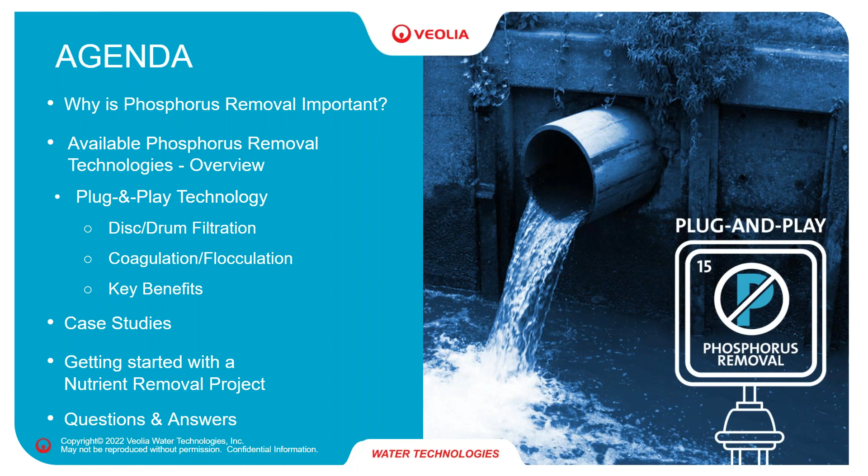And then we'll have some time for questions and answers at the end. So as I said, we'll start with a little bit of groundwork. Why is phosphorus removal important?

It really comes down to our environment and the impact that nutrients can have when discharged into the waterways. So when these nutrients, nitrogen and phosphorus-based compounds, get into the waterways, it really results in the algae present in those waterways using that and growing excessively. This is called eutrophication. And when they do that, they're uptaking the oxygen in the water, and that has a negative impact on the aquatic life. So many places will see fish kills and other damage to the ecosystem there, which is not a good scenario.

It's also can be quite unsightly from a tourism and swimming type scenario. So definitely things that the governments and the people have decided that this is not something we want to continue.

In terms of sources of where this comes from in wastewater, it can be residual nutrients from the processes that a particular plant may have. Could be cleaning chemicals—many of those use phosphate type compounds in their chemicals and detergents—and then nutrients inherent to just organics. So farming and even municipal wastewater carries with it nutrients laden in that.

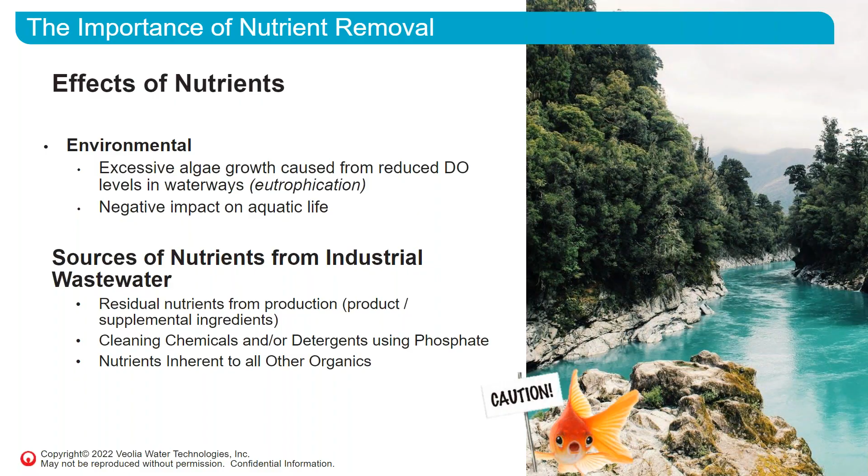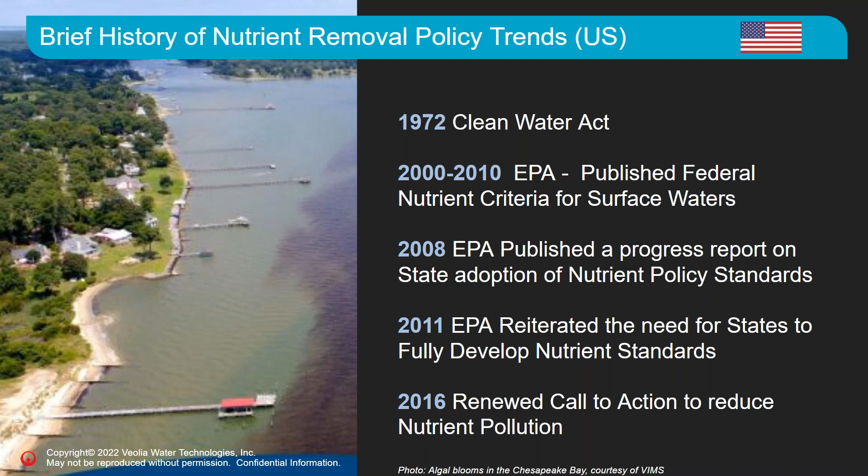In 1972, the U.S. had the Clean Water Act passed, which really began a focus on protecting and trying to restore these waterways. You can see throughout the 2000s following that, EPA publishing nutrient criteria progress reports on where that stood in 2008. In 2011, reiterating the need for states to really develop the nutrient standards they needed to protect the waterways within their boundaries. And in 2016, again, a renewed call to action to reduce nutrient pollution. You can see here on the left a photo of Chesapeake Bay in eastern United States.

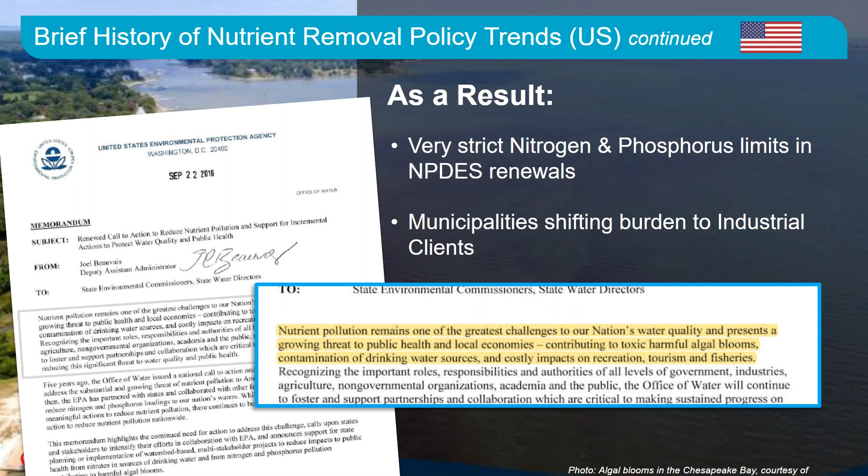As a result of this, we are seeing and have seen over the last several years increasingly strict both nitrogen and phosphorus limits in these permit renewals. Municipalities are really shifting that burden onto, as they can, their clients that are sending them wastewater to the treatment plants. You can see here just a little snippet from this EPA memorandum: nutrient pollution remains one of the greatest challenges to our nation's water quality and presents a growing threat to public health and local economies, contributing to toxic, harmful algal blooms, contamination of drinking water sources, and costly impacts on recreation, tourism, and fisheries.

We have many attendees here, I believe, from Canada as well today, and a very similar scenario, although regulation for Canada is really at the provincial level. But nonetheless, an evaluation is really made at the local level with these receiving water bodies to determine how sensitive they are and what types of impact the wastewater could be having coming in, and what the limits need to be as a result, to try to limit and improve those impacts and improve the water body.

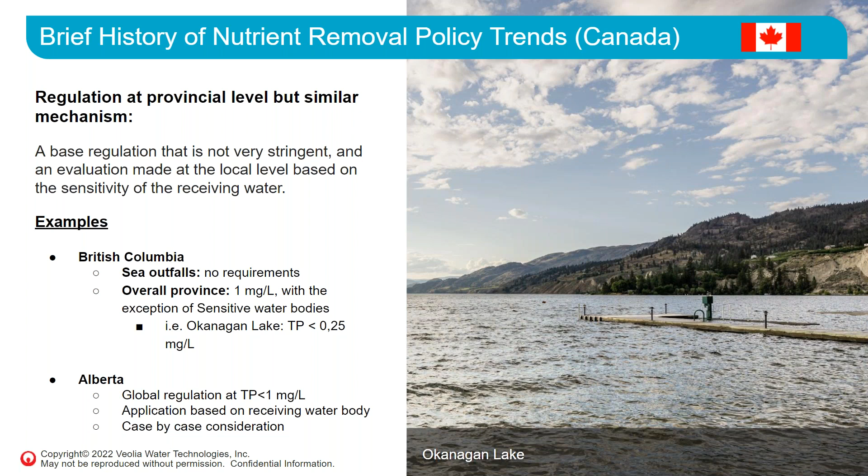As an example, in British Columbia, while sea outfalls really don't have any requirements overall, the province has a 1 milligram per liter total phosphorus limitation, but then sensitive water bodies such as Okanagan Lake can have more stringent limits, as we see here with a total phosphorus of 0.25 milligrams per liter. And then again, Alberta is another example of global regulation within the province—total phosphorus less than 1 milligram per liter—but it can be a case-by-case consideration on whether a receiving body may need to have more stringent limitations for those ones that may be discharging into that water body.

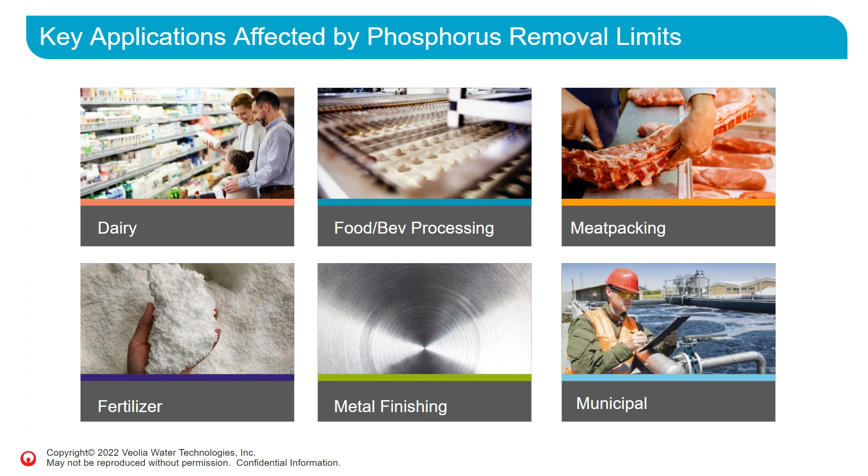Now, what are some key applications that could be affected by this? Well, it really is a wide spectrum, as you can see here, from dairy, food and bev processing, meat packing, fertilizer producers, metal finishing—where they can use phosphate type chemicals in that process—and of course municipal wastewater, as we mentioned earlier. So this certainly doesn't cover all of those industries, because at the end of the day, if you have a limitation that needs to be met, then you're impacted here by this and the need to remove the phosphorus.

So we're going to go into the discussion of technologies, and from sort of a big overview perspective, many plants will have many stages of treatment. You could have primary treatment to remove solids at the first stages of the plant. Many times these stages, if the plant has a nutrient removal requirement, will implement chemical dosing to enhance their primary treatment in order to start to remove the phosphorus.

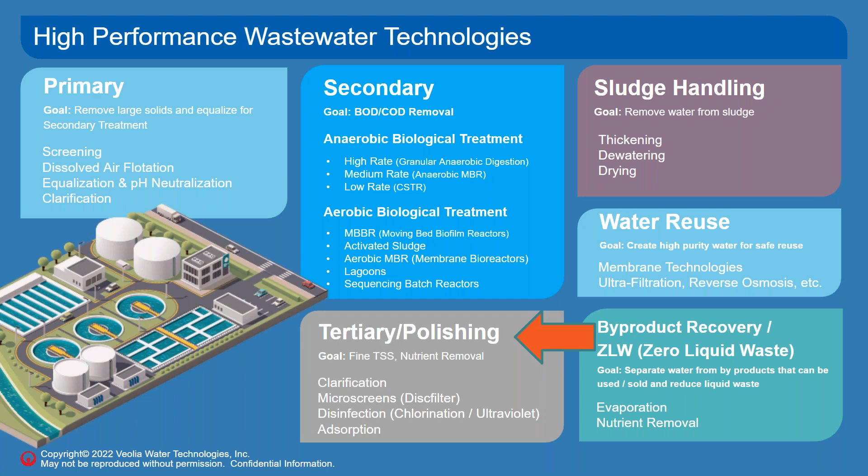Secondary treatment is another key component, where you can have typically biological treatment to help with removing phosphorus. That's very effective. The technology we're going to share specifically about today would usually be considered the tertiary or polishing step, to really get to the low levels of phosphorus removal and effluent limitations that need to be met.

So when we talk about phosphorus or nutrient removal, today we're really focusing on phosphorus. There's two main categories or methods. One is biologically, where we're talking about systems like activated sludge, sequencing batch reactors, MBBR, membrane bioreactors. All of these use biological treatment systems with bacteria, using the nutrients and uptaking them in order to process them and remove them through the floc, being disposed of through the biological sludge from those processes.

Alternatively, you have physically or chemically those methods of removal. Here, physically, we're talking about clarification, so settling, and that could be either traditional clarification with large retention times and a settling mechanism to allow the solids to settle, or high rate clarifiers, which use methods to speed up that process and get the solids to settle faster. Could be flotation, could be filtration, from media filters to actual cloth filters.

But in any case, many times the phosphorus is not only in a solid form, it can be dissolved in the water. And when it's dissolved, a chemical step will be needed to turn that from a soluble form to be precipitated with a chemical reaction and turn it into a solid form. And so that's what we're talking about here with coagulation and flocculation. Those steps can be combined with physical separation in order to increase the phosphorus removal.

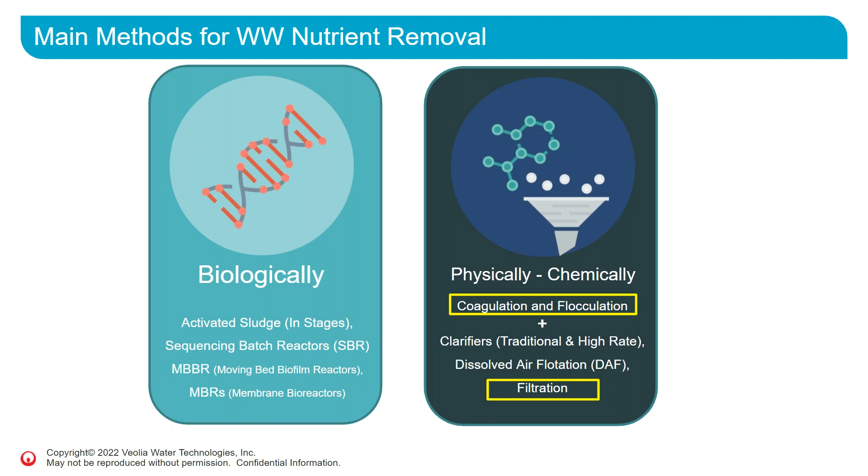All right, so continuing then with just a very rough, I wouldn't say highly detailed, but from a general standpoint, most sites will be able to use biological treatment for achieving levels down to about 1 milligram per liter of total phosphorus. And having said that, these other methods as well can be used to take higher levels down to that as well. But oftentimes we see that many sites, if they have biological treatment, will achieve about 1 milligram per liter with clarification and settling or flotation, whatever the process may be they have on site, and maybe with some backup means of coagulation for trimming and meeting their effluent limitations.

Typically, to get down to less than that, into the roughly 1 to 0.5 range, a client may need to add another step behind the clarification method. That could be, in this case, microscreens as an example of filtration following the clarifiers. That will typically get to about 0.5 milligrams per liter. Getting down to below that, into the say 0.3, 0.2 range, would require an added step ahead of those filters with coagulation and flocculation, and I'll be explaining that as we talk further. That could typically get you down to as low as below 0.1 milligrams per liter, and then ultra low, less than 0.05, you're talking about quite intensive membrane filtration to achieve those limitations.

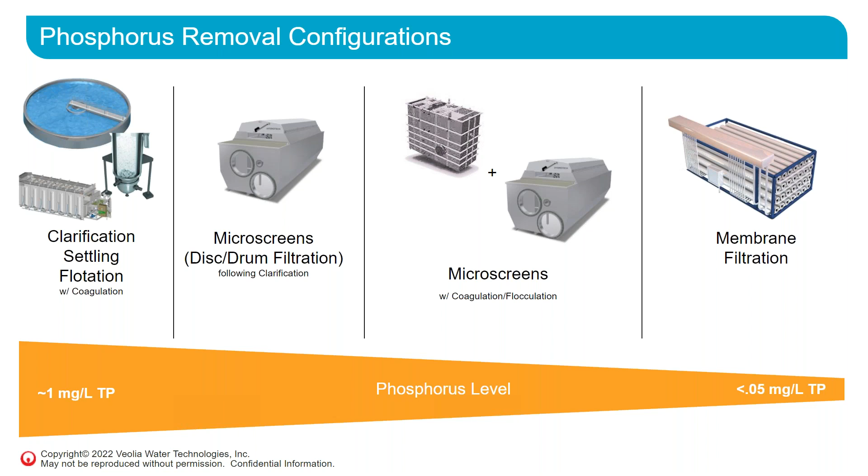So we wanted to share with this webinar specifically the technology we call plug and play phosphorus removal process, which we've termed Nutri-Pack. Pack just being focused on the plug and play aspect and being able to package this together.

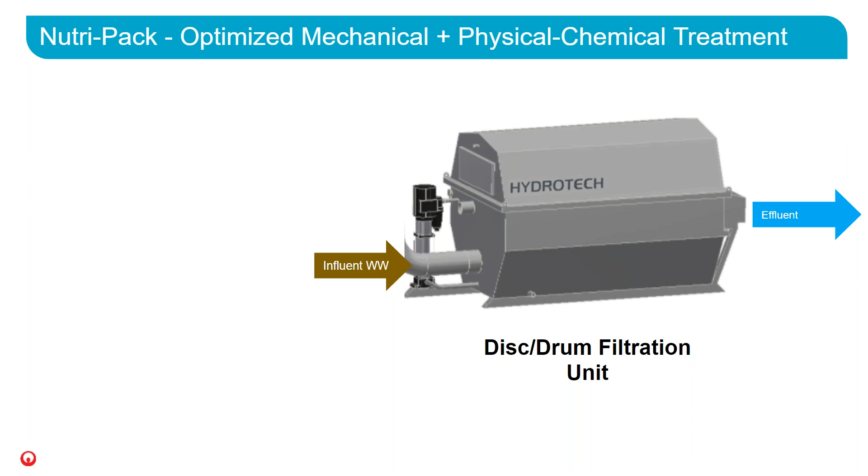As I said earlier, this is focused around our Hydrotech filtration technology. It's been established for many years, and this is either a disc or drum filter, and I'll share more details of that in a minute.

But the exciting thing here is we now have a few categories where we have pre-engineered coagulation and polymer systems to allow this to be coupled up and get removal of not only particulate phosphorus, but if you have soluble phosphorus in solution needing to meet low limits, this can be added and packaged with the system to meet those needs. We'll be sharing the details on this.

So first, to talk about the filters, Hydrotech filtration. This is a proven technology. I started selling the disc and drum filters in the 1990s, so over 20 years of experience with this technology, with continued development to improve it.

It's what we call an inside-out filtration process, which I'll explain further in a minute. It's very effective at solids removal. The media ranges from 1,000 micron in size to 10 micron, and at those small 10 micron opening cloths we can get very effective solids removal, up to 95% suspended solids, which helps us achieve high levels of removal when precipitating phosphorus and trying to get it out of solution.

It has a very small footprint when compared to other filtration technologies, particularly sand filters or, in extreme cases, clarifiers. This will be just a fraction, could be 10% or less, of the footprint required to treat the same flow capacity. And it's very efficient.

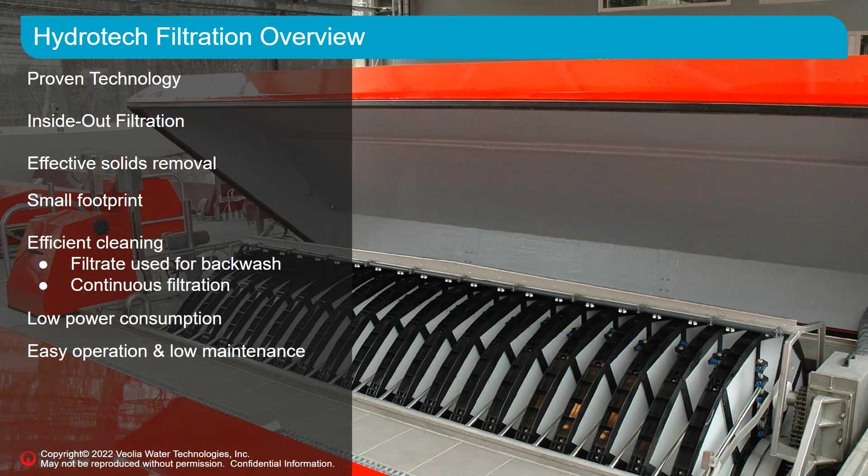How do these work? I mentioned these were what we call inside-out filters. To explain that a little, you see a couple of diagrams, one showing a disc filter sketch and also a drum filter sketch. These both operate in the same format in that the influent comes into the center of a central drum.

For the disc filter, from that drum the water flows inside to the inside of discs with woven cloth media on each side of those discs. For the drum filter, the water flows inside and then goes through the cylinder, through the circumference of the cylinder where the media is wrapped around the unit. But in both cases, the effluent flows to the clean side.

The solid particulate is captured on the inside of the media, and then the clean filtrate is discharged over an effluent weir.

As the solids collect, the head loss increases through the media, and so the inlet water level rises. As it does, that is monitored with instrumentation to trigger the backwashing process, which rotates the drum and starts the high pressure spraying to clean the particles from the media. Then the solids are collected in a trough suspended inside the drum and flow out of the unit. You can see the sludge outlet here from the disc filter and the sludge outlet here from the trough on the drum filter.

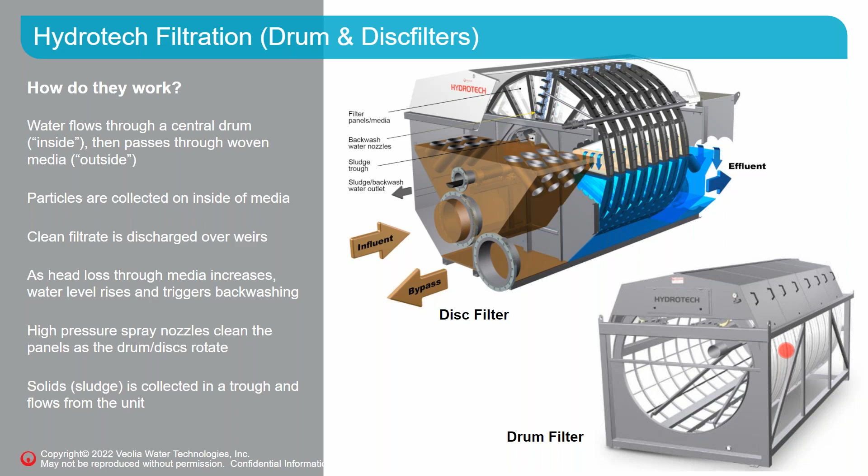Here's just a couple of photos to show you what a disc filter media panel would look like. You can see it's very accessible, easy to inspect, as well as, if there needs to be a replacement for any reason, easy to get access and do that.

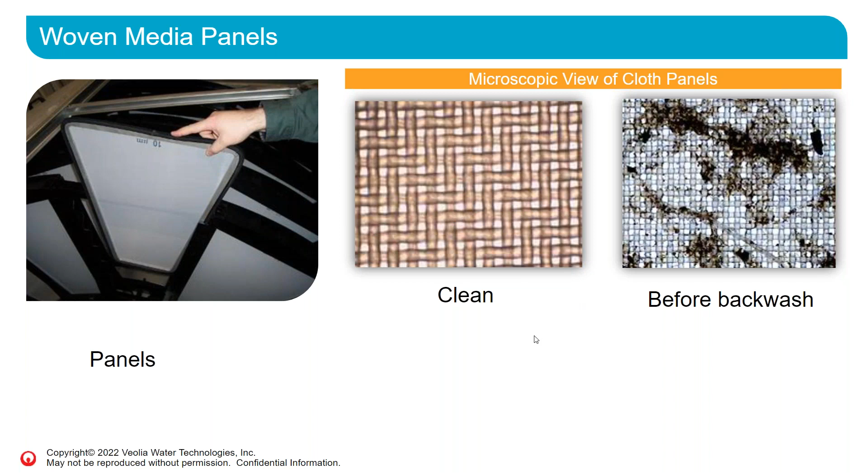Here you see microscopic photos of clean woven media, and then before backwash with the solids collected.

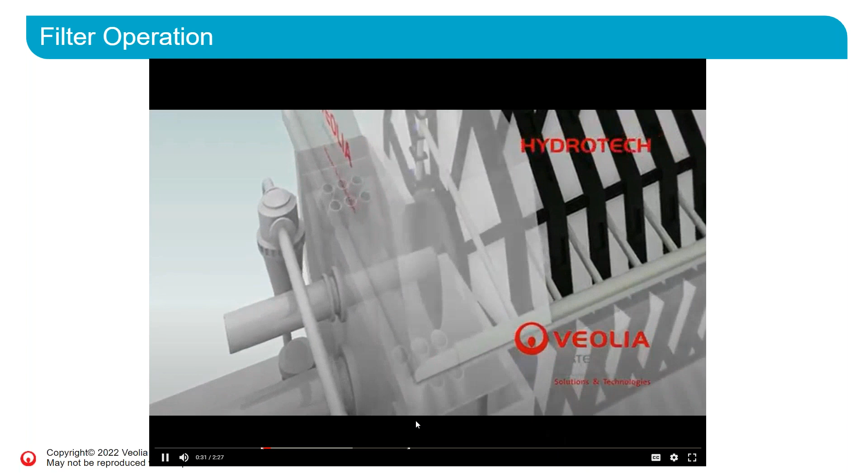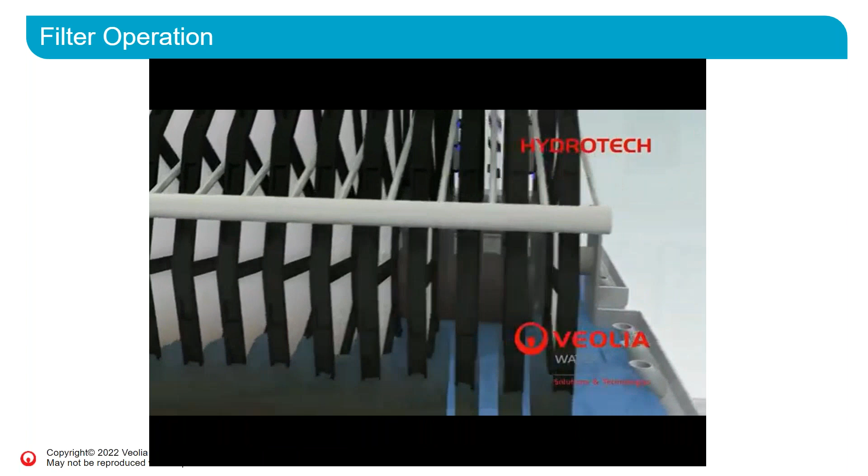I want to share a quick video here to talk through the process again. So with this computer generated animation, you can see the water coming into the central drum, flowing through the media panels, with the solids being collected on the inside. The clean water flows out through the filter panels over a discharge weir.

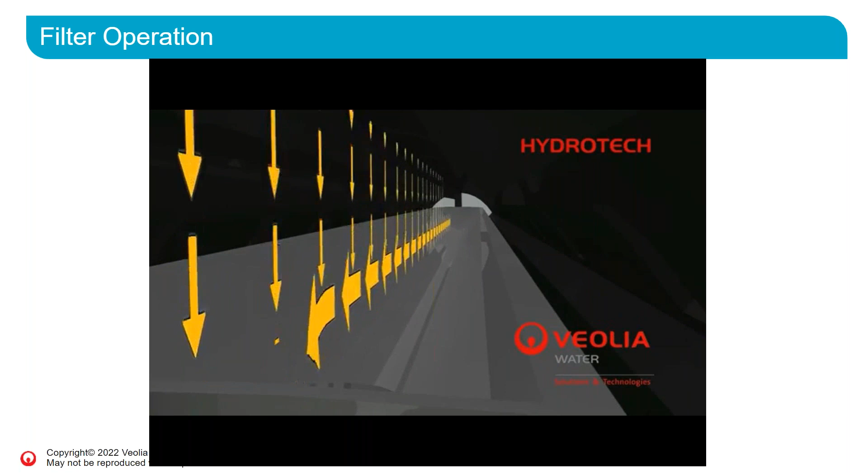As solids are collected, the inlet water level rises and triggers the backwash, which starts the rotation of the drum and the high pressure spray to knock the solids from the inside surface. When the solids are removed inside, they flow into the trough and then gravity flow out of the unit with the backwash water and the sludge being removed.

So now I would like to talk about combining that technology with coagulation and flocculation, because this is the key step when we're looking at phosphorus removal that is in solution.

So if we talk a little bit about pre-treatment chemistry, if we have influent coming in, we would need to dose some metal salt. This is typically based on either ferric or aluminum-based, iron or aluminum-based metal salts. This will have a chemical reaction with the solubilized phosphorus and produce particles. However, these are typically what we would call unstable particles, not very strong or of adequate size for us to capture them on the filter media.

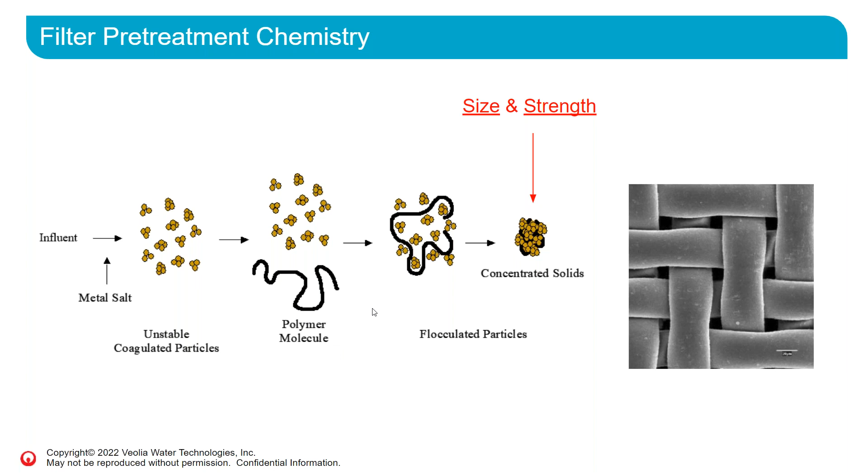For us, size and strength is critical. And so polymer is typically added. You see the polymer molecule, which when combined with those coagulated particles forms a nice floc, a concentrated floc that can be captured on the filter media.

And here's just an example site photo. This is in a drum filter, but you can see really heavy, solid, good flocs there that the filter can then capture and remove.

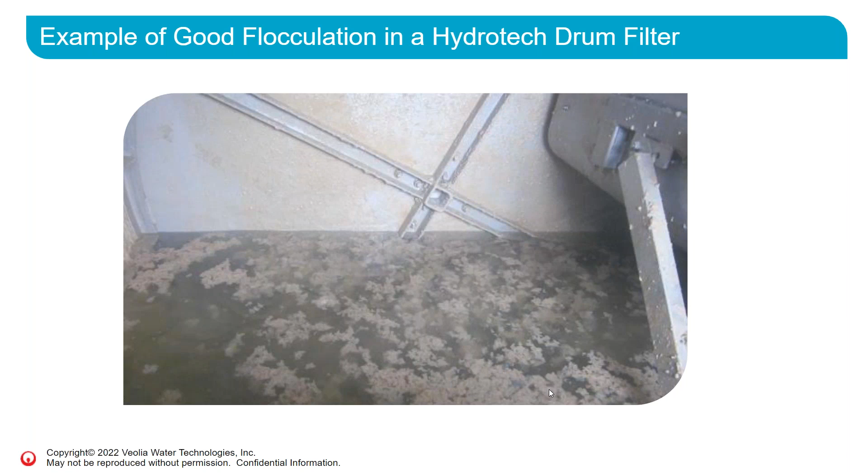Where does this fit in your treatment process is a question often asked, and so it could vary depending on the site and what the needs are, but here's an example of a common location where it would be placed into the system. If the client has existing biological wastewater treatment, such as activated sludge, they may be already dosing coagulant upstream of their clarification step or flotation step.

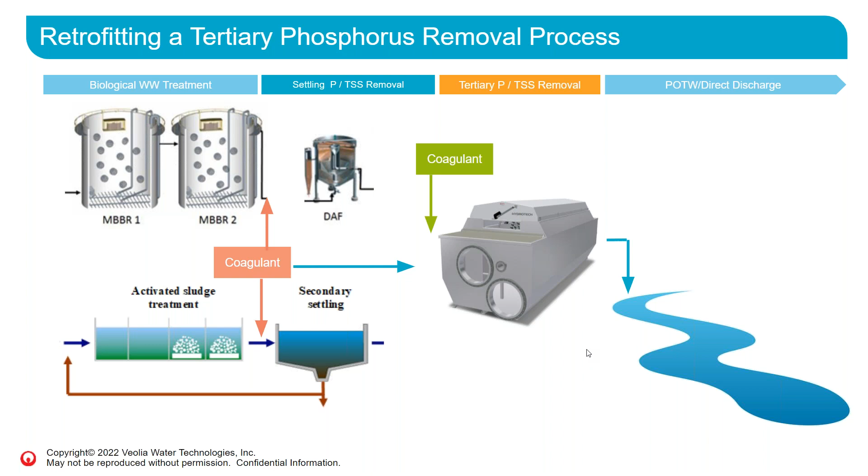And so this could be envisioned as a tertiary plug-and-play system to put in, depending on the limits, either with coagulant, which would be key if the phosphorus is in solution, or if they're close enough and they feel like the 10 micron media can remove the particulate, then it may be adequate to just add the filter and achieve their demands before going either to the local municipal treatment works or direct discharge.

Several minutes of retention time. After that, a polymer would be dosed before feeding into a flocculation stage with, again, several minutes of retention time and mixing before going to the filter. At this stage, we've built a good, strong floc of good size and strength that can be well removed, efficiently removed with clean effluent, and the solids can be collected to take to discharge.

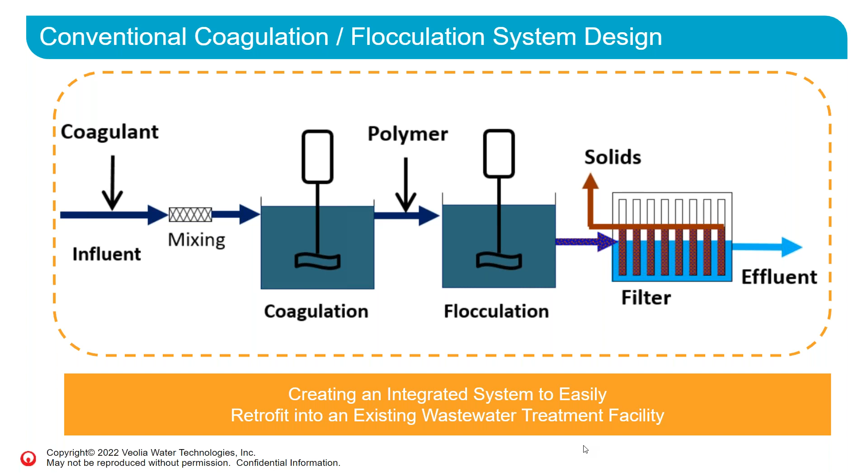What we really wanted to focus on here today is that this entire system, what you see in this box, can be an integrated system that easily retrofits into an existing wastewater treatment facility. Certainly, all these steps could be acquired individually, but we feel like there's a big advantage. The expertise and experience we've had implementing these systems has allowed us to key in on a few flow ranges and provide pre-engineered systems to make this easy for a facility to implement.

Again, that's what we're looking at here with the pre-engineered coagulation and polymer systems. This includes both tanks, mixers, and the dosing. So we typically would use dosing pumps for coagulant and polymer included before feeding to the disc and drum filtration unit.

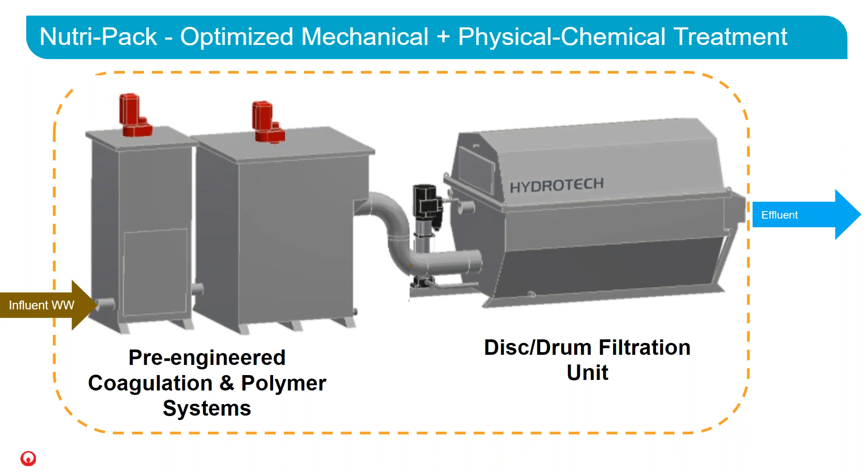And again, just to highlight what's included in that box, what is being provided here. We're talking about the coagulant mixing, so this is the several minutes of retention time with a mixer. Floc mixing, again, several minutes of retention time, and then going to the filter for discharge.

Also included is coagulant dosing pump and polymer dosing system, make down and dosing both. And then finally included with that is our control system with controls strategy PLC logic that we've developed with feedback and feed forward control, which we've been able to prove by using instrumentation to measure the water conditions to get a very effective, dialed-in dosage on that. Some of our clients have seen pretty substantial reductions in chemical usage, as well as savings in the volume of sludge produced because of the efficiency of that process.

Other options are digitally enabled remote monitoring connected to this system through the cloud. We can also provide semi-automatic deep cleaning. So many times when using chemicals, the filtration will need periodic cleanings, and there are several stages of cleaning that can be provided as add-ons to help with that process. And then finally, chemical and equipment services is something as well that we can offer to help the client as needed.

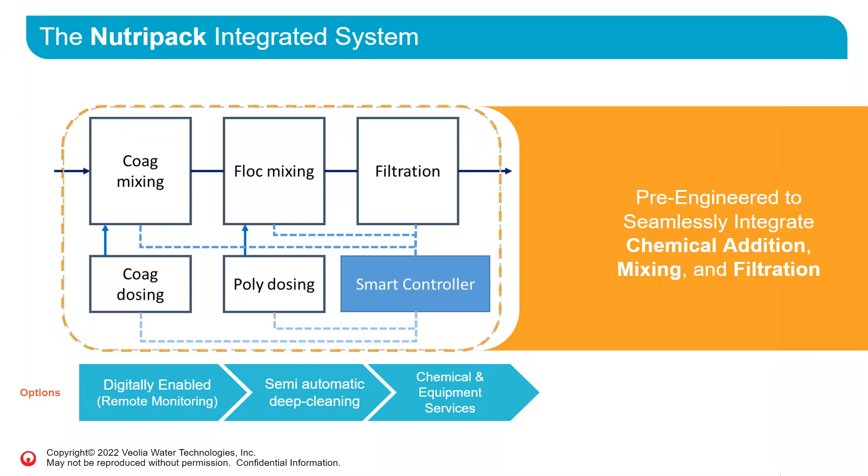So what are the key benefits of this NutriPack plug-and-play solution?

If we focus on performance, as we've already discussed, when you need to get these low levels of phosphorus, in some cases we're seeing locations putting permits out with less than 0.1 milligrams per liter of total phosphorus concentrations. It's key to have a solution that can achieve that, and we've proven it both with pilot studies, R&D, and now full-scale operating sites. That can be done: 90% reduction of phosphorus.

Also the total suspended solids, achieving that high level of reduction. I mentioned in the previous slide that with the PLC logic we've developed, doing this both in pilots and full scale, we've seen increased savings for sludge disposal and production, because you can target dosing compared to upstream coagulant dosing where it's not as effective. There could be interference from other sources such as carbon-based contaminants and pollution. Here you're dosing downstream at the tertiary level where you can really focus on the phosphorus and reduce coagulant consumption. In some cases, we've seen that reduced by 70%. So optimized chemical usage as well as reduced sludge production.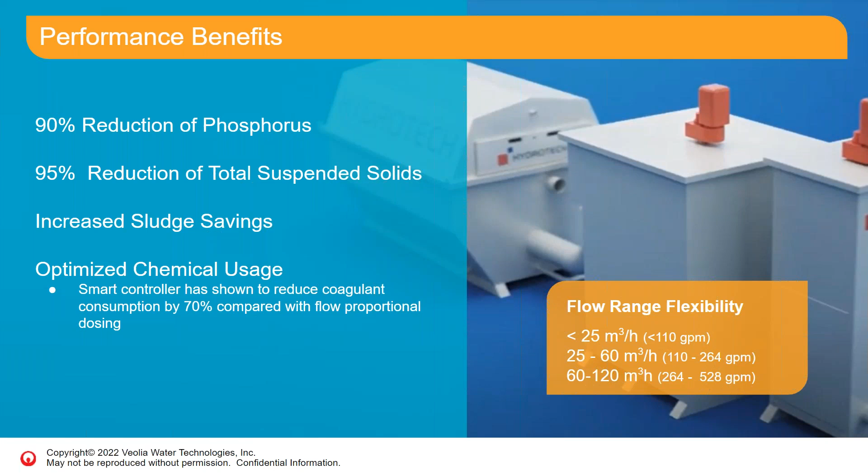One of the key benefits here comes down to footprint. We talked about performance; now let's talk about footprint. This really goes into a number of areas, but footprint, whether industrial or municipal, oftentimes associates with dollars. Just as we'd sell our house at so many square feet or cost to build it, it's going to be the same here for implementing a new treatment solution to help meet a limit. One key advantage is limited footprint. Compared to this example facility's existing wastewater treatment plant, the solution to add on the NutriPack and provide the phosphorus removal they need is just a fraction of that footprint, in this case within a 2 by 5 meter footprint.

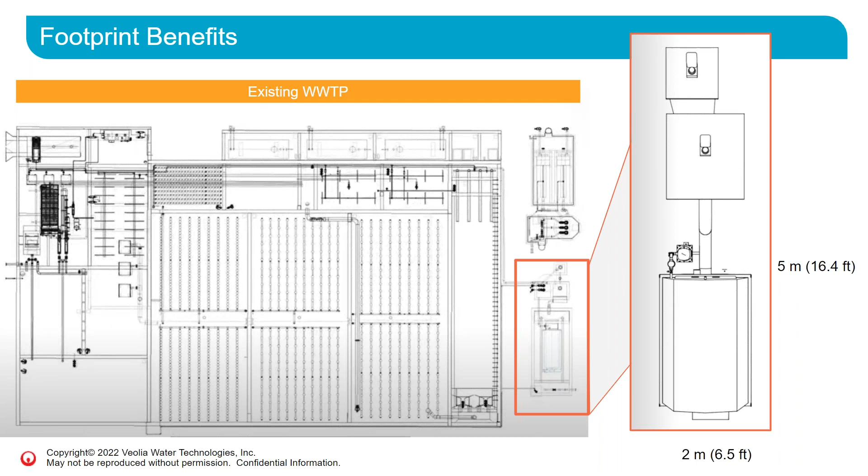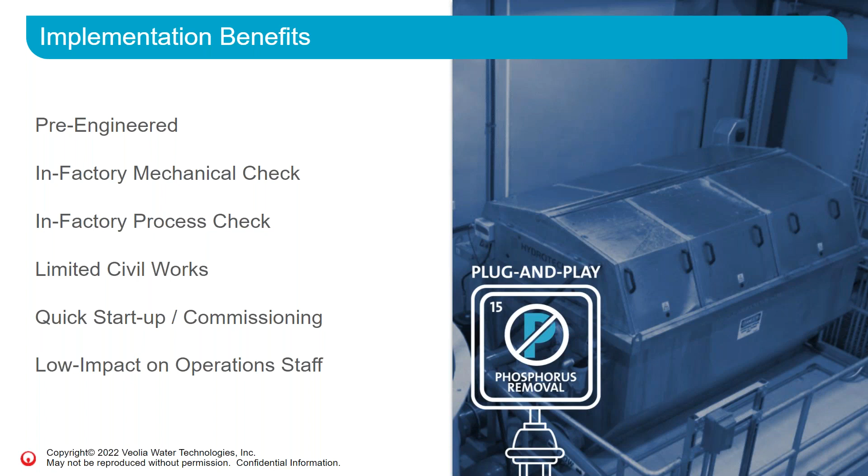Final benefits I wanted to highlight were implementation benefits. Again, these 3 flow ranges are pre-engineered. You can package this up with the tanks, the filter, the controls, the chemical dosing, all pre-engineered and ready to go. This saves the client time and money by not having to research this themselves, or have a consulting engineer chase it, or work with several different integrators - instead having one integrator for the solution. With that comes our in-factory mechanical and process checks to make sure it's functioning well. There can be limited civil works, either to put this on grade, in a small building, or we can even containerize it to ship in a container right to the site. There's a relatively quick startup and commissioning, as opposed to some processes with long startup times - once it's piped and electrically connected, it's ready to be put into service. And finally, a relatively low impact on operations staff, since it's simple to operate and maintain.

We thought it would be helpful to wrap up with a few examples of how the technology has helped clients succeed. This looks more holistically at full-scale implementation, from large sites - in some cases up to 30 million gallons per day, or almost 5,000 cubic meters per hour - to very small plants, down at 70 cubic meters per hour, about 400,000 gallons per day. Key here is you can see a range of needs; each client is different, some not as stringent, but many of these are targeting even down as low as 0.075 milligrams per liter. These clients are a mix, both municipal and industrial, using this technology for their phosphorus removal.

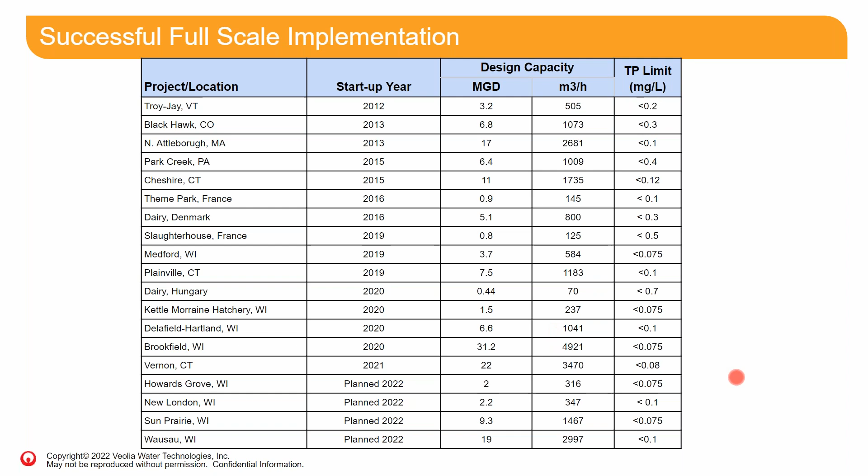This is a location in Pennsylvania. It's a chocolate producer. Many of you would well know the name.

They had an overall need to upgrade and replace their outdated wastewater facility. They also wanted to future-proof themselves, preparing for the future and what the limitations could be.

For their design basis specific to phosphorus, they were looking at an influent of around 7 as the design basis, and a need to meet an effluent discharge of less than 2.

You can see in this case they have a number of biological stages. They have a DAF for flotation to remove solids, but they also had a need to implement a polishing step, the Hydrotech disc filter, and prior to that a flocculation stage, in order to catch and polish those final particles of phosphorus and get the limits they needed.

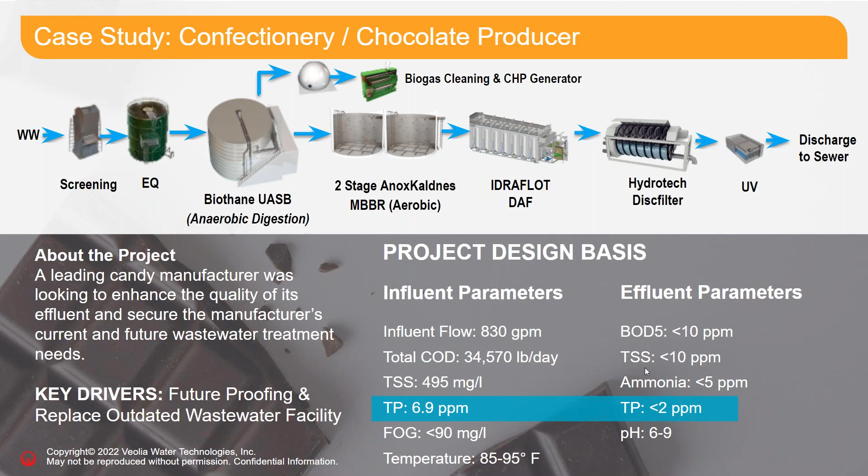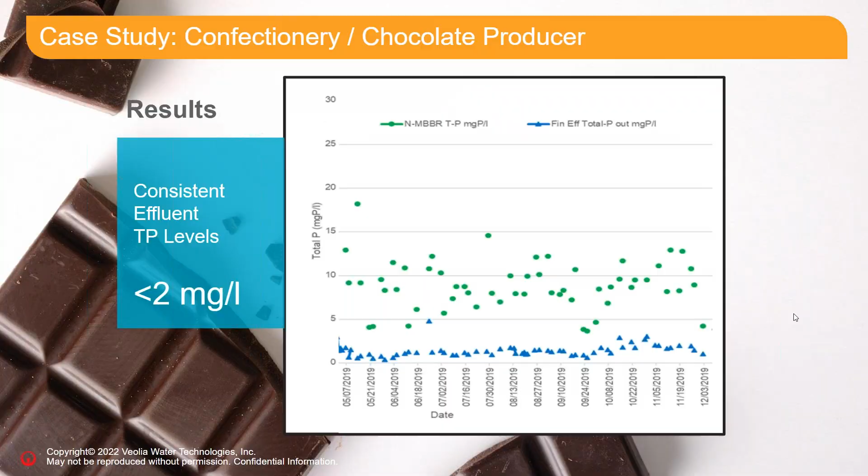Another case study here was a dairy client, making cheese products, who again needed to implement a process to treat their wastewater prior to discharge. Key drivers here were really the discharge regulations and being able to keep this business running and meet their production goals.

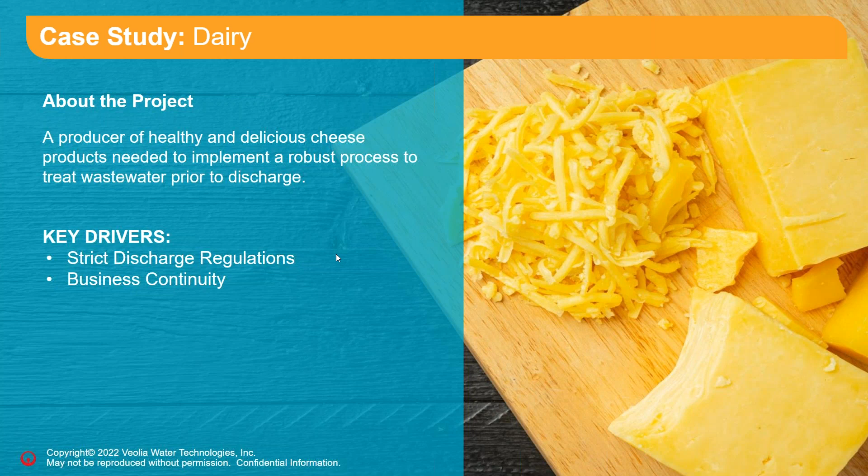Their influent has averaged about 3 milligrams per liter. They are up and running and consistently meeting their target, which is stringent for them - their limitation was less than 0.7, and they are able to achieve that. This site has chemical pretreatment tanks upstream with coagulation and flocculation, followed by the filtration system.

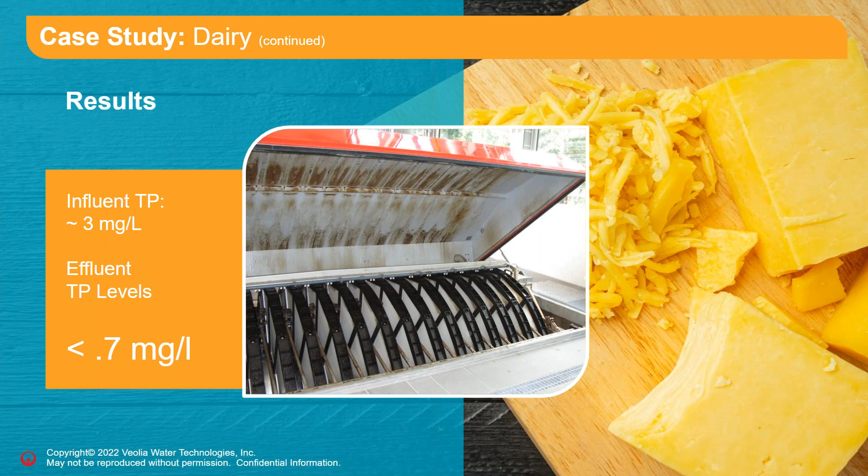I also wanted to mention this municipal case. This was an existing wastewater treatment plant. They had a target of less than 0.075 milligrams per liter of total phosphorus to be met by 2024.

They were not able to do that with their current wastewater treatment plant. So regulatory compliance was a key driver for them, but another driver was to try to be compact and stay within the existing footprint of the facility.

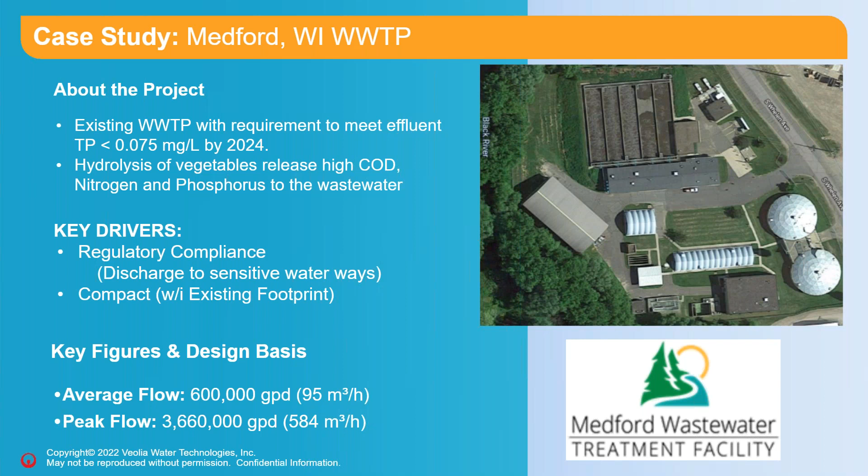The Hydrotech filters were a key part of that because they were able to be placed inside the existing infrastructure. These basins you see the filters installed in were prior sand filters. So this was a big advantage to this site to be compact and fit into their existing footprint.

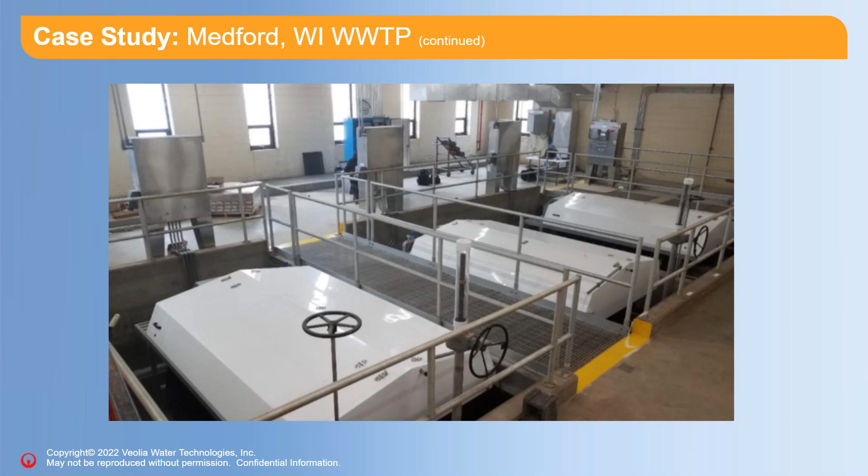Here's some data from when this was started up at this location. You can see once they started the chemical dose, they were averaging about 0.2 milligrams per liter on the inlet to the filter. This is not the plant influent, this is the influent to the filter system, prior to the coagulation and flocculation tanks.

Once they started the chemical dosing, they were able to drop that right below - very efficient and effective, keeping it below their effluent TP criteria of 0.075, and actually averaging just under 0.05 milligrams per liter of effluent phosphorus.

There are some photos there - you can see the flocs. The top photo is a sample collected in a glass beaker; you can see the well-formed flocs. The lower one is in the flocculation zone, prior to being fed to the filter.

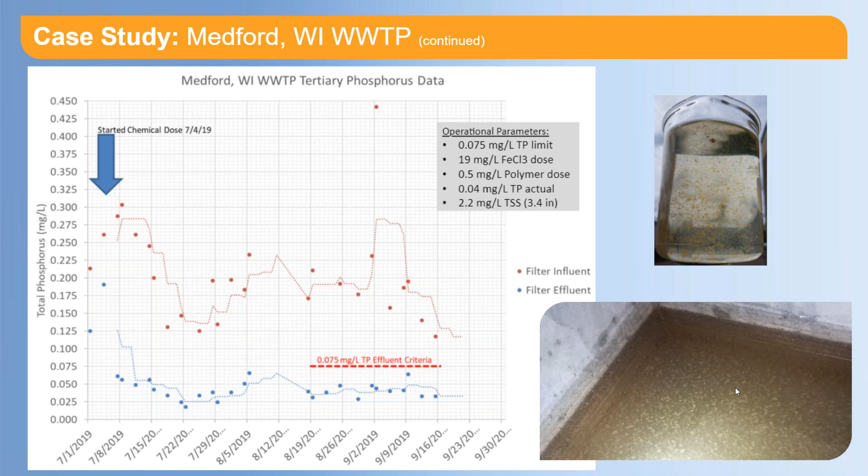So how would we get started if you have a need and are interested? A key thing would be to know what your goals are - what do you need to achieve? New and updated permits or regulations are a starting point.

Knowing what your current system is doing and the performance it's getting - data collection, as we've shown, is a key part of that, in order to establish where we're at and where we need to get to. If that data isn't on hand, we can use production numbers or other methods to estimate and determine the current situation and what our system can achieve in order to get the site where it needs to go.

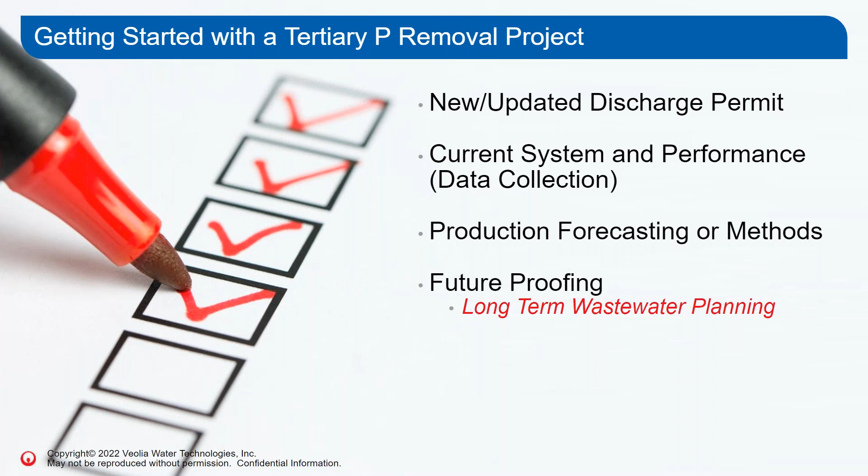And another thing, maybe that's not the current scenario. Maybe you don't have existing limitations, but you're looking to future-proof or prepare for long-term wastewater planning. That could be another scenario where you reach out to us and say, I don't have an immediate need, but I want to be prepared in case this comes down the road several years, because I'm hearing that in our locality this is a concern. So that could be a reason to get started and reach out to us.